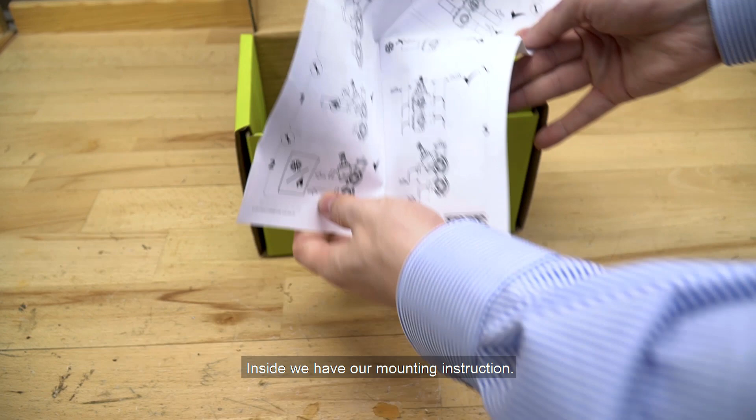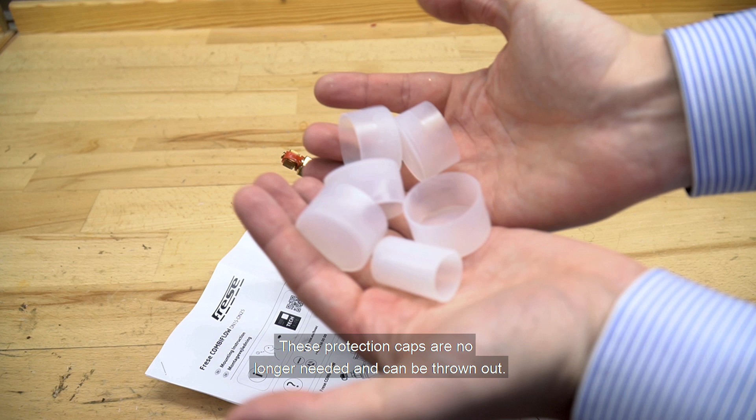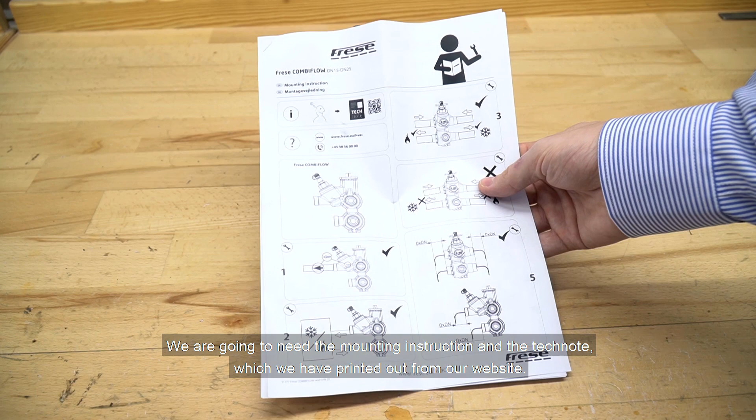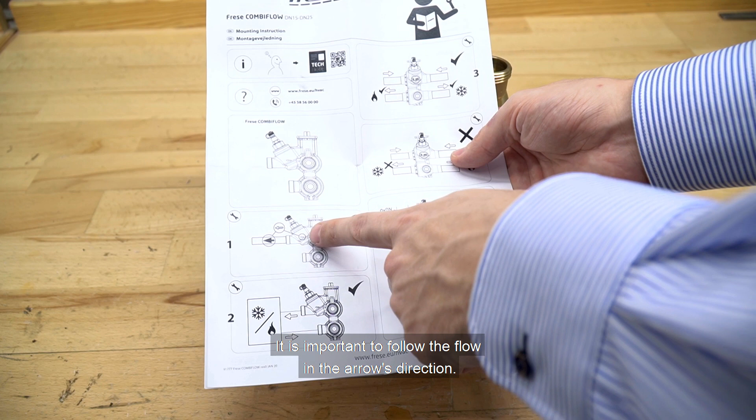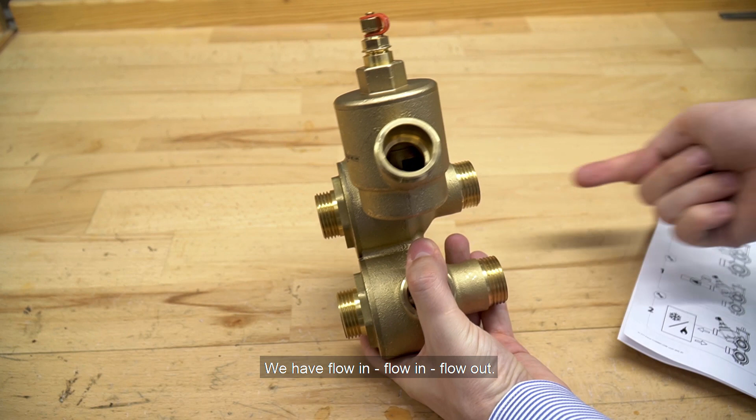We're going to need the mounting instruction and the tech note, which we have printed out from the website. We have our valve, which looks like this. And it's important to follow the flow in the arrow's direction. On this one we have the arrow here, so the flow goes out here. Flow in, and flow out, and flow in, flow out, and flow out.

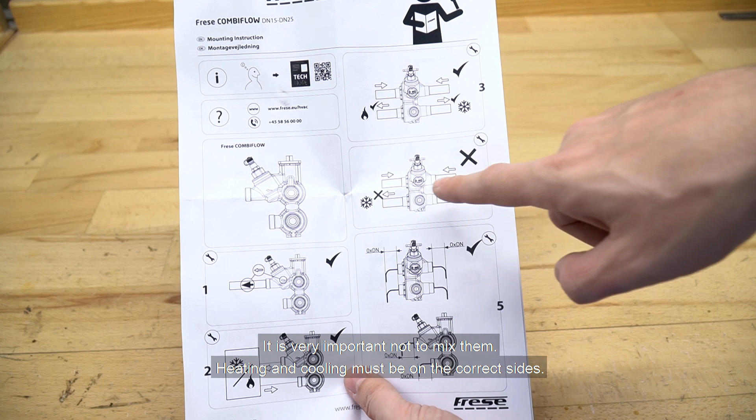And these go to the fan coil. And we have heating on one side, cooling on the other side. Very important not to mix them. Heating must be on the correct side and cooling must be on the correct side. And we have heating in, and heating out, cooling out. These two connect to the fan coil.

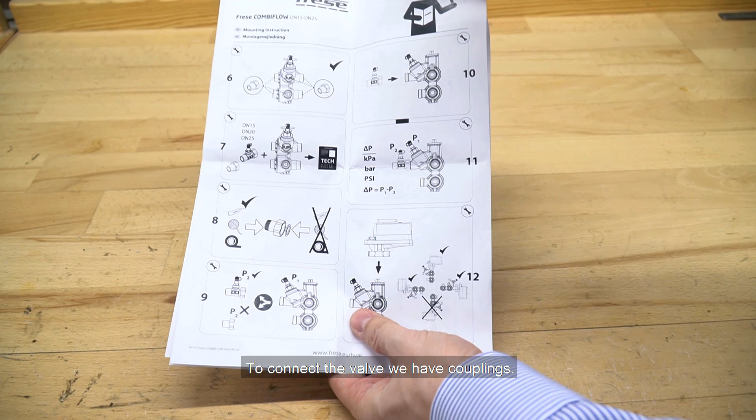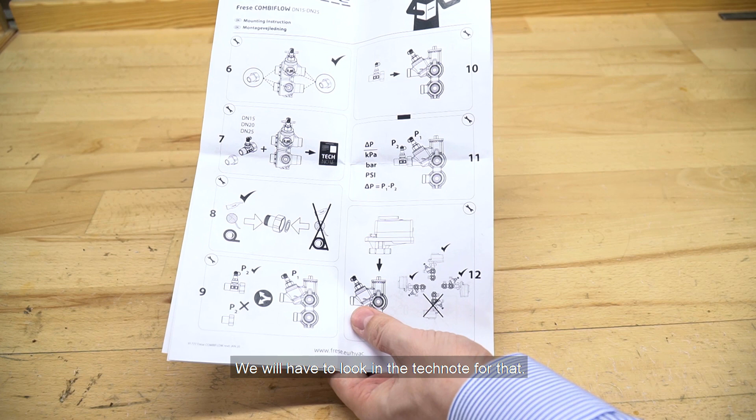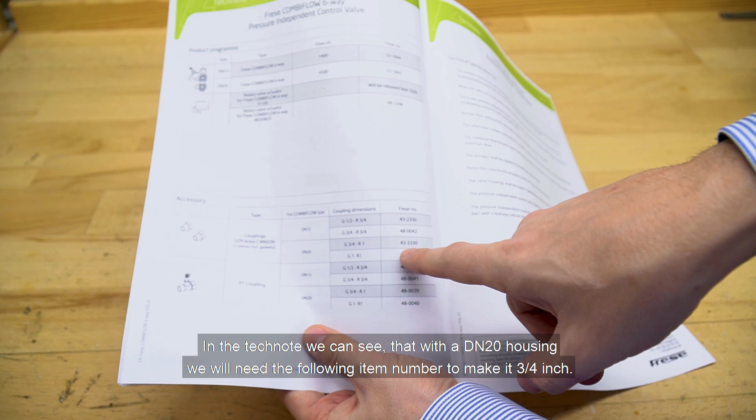To connect the valve we have couplings, and they come in various sizes depending on the size of the valve, along with a PT coupling. We'll have to look in the tech note for that. In the tech note we can see that with the DN20 housing that we have here, to make it a 3/4 inch we'll need this following item number.

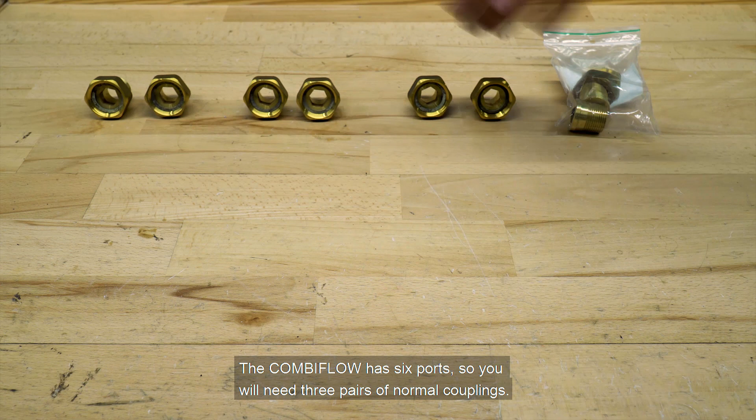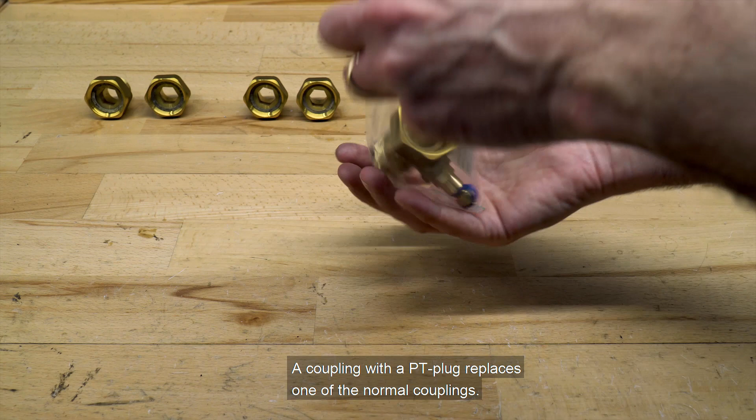To mount the COMBIFLOW you will need 6 couplings. The couplings come in pairs of 2 in a bag, and the COMBIFLOW has 6 ports, so you will need 3 pairs of normal couplings. If you wish to measure the differential pressure, you will need a coupling with a PT plug. The coupling with the PT plug replaces one of the normal couplings.

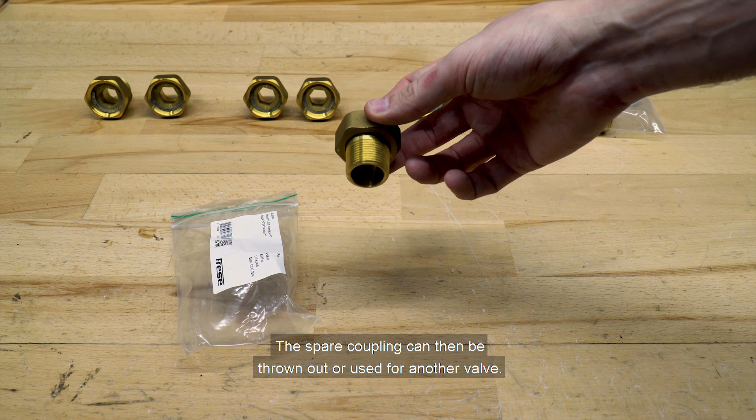The COMBIFLOW thus uses 5 normal couplings and a coupling with PT plug. The spare coupling can then be thrown out or used for another valve. If you have 2 COMBIFLOWs, you will therefore need 2 couplings with PT plugs and 5 pairs of couplings, or 6 pairs if you don't need to measure the differential pressure. So we have 3 of these coupling sets now. These are easily mounted.

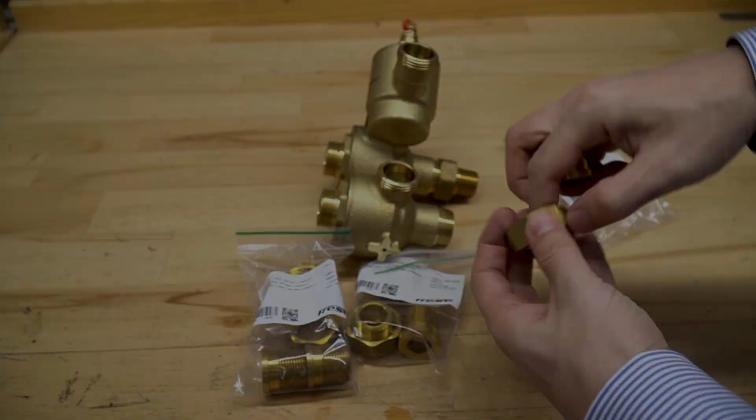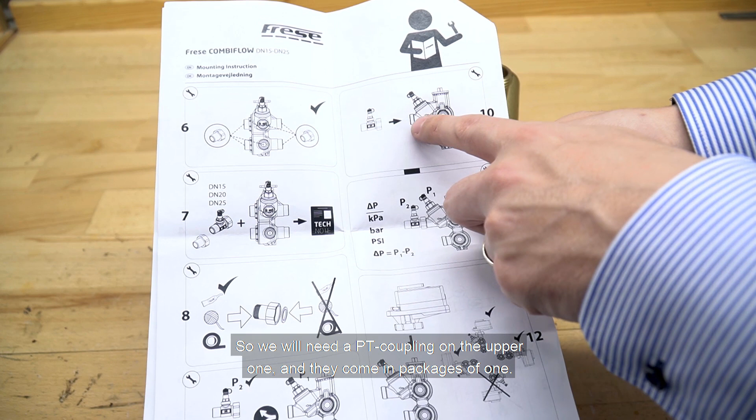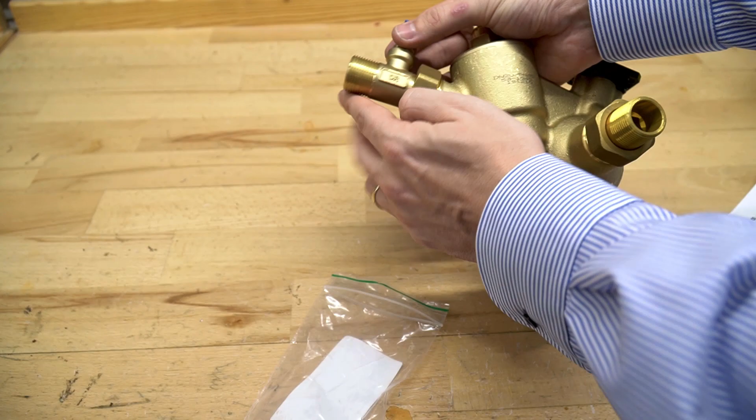Now, in our example here, we are going to want a PT plug in order to measure the differential pressure, P1 and P2. So we'll need a PT coupling on the upper one, and they come in packages of 1. Remember to tighten the couplings.

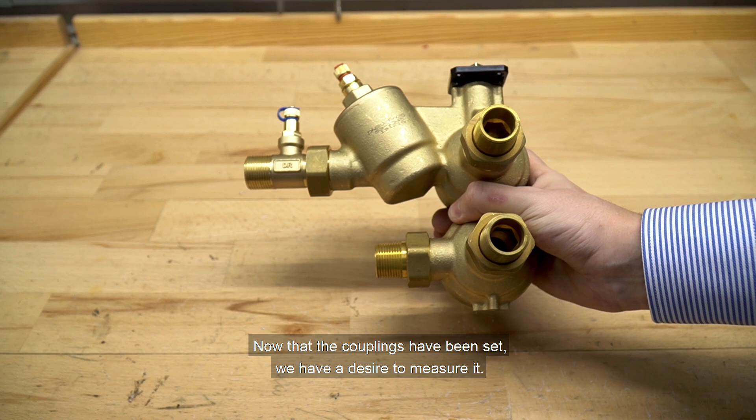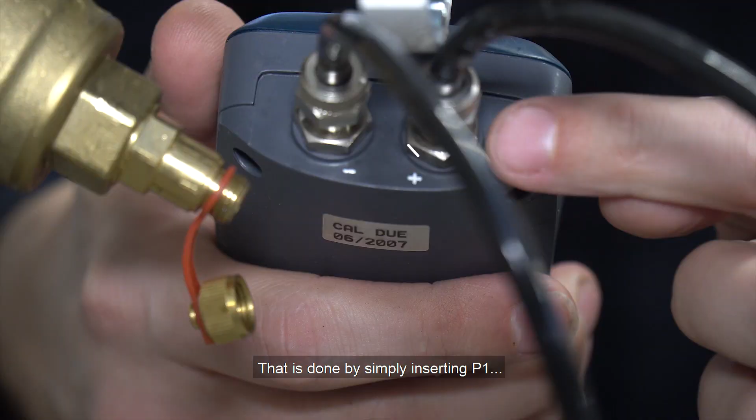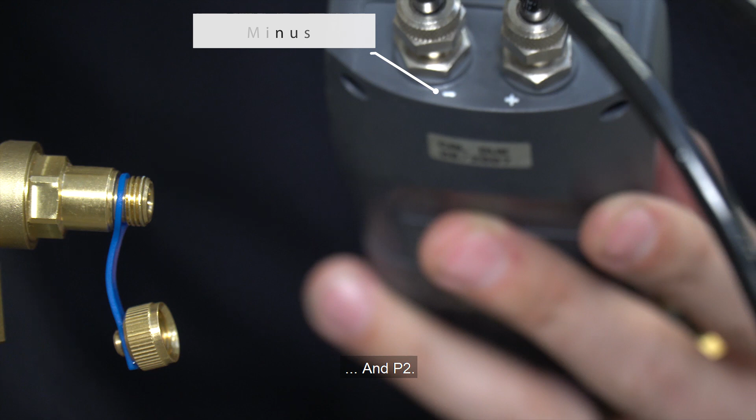Now that the couplings have been set, we want to measure it. That is done by simply inserting P1 and P2. And now we can measure the differential pressure.

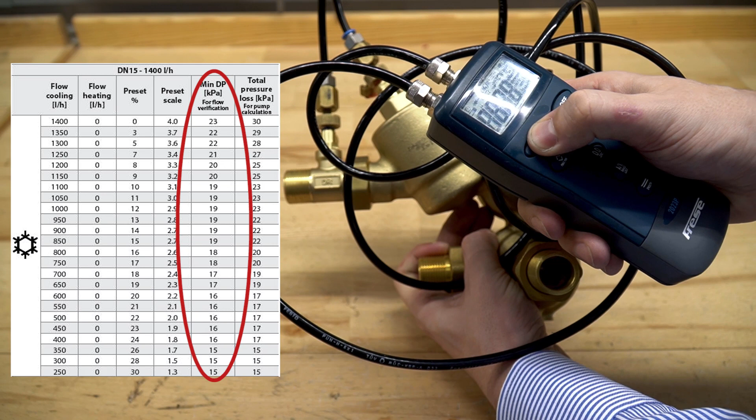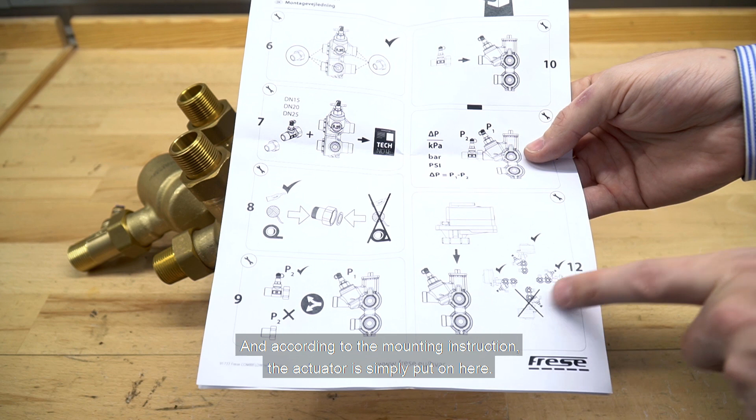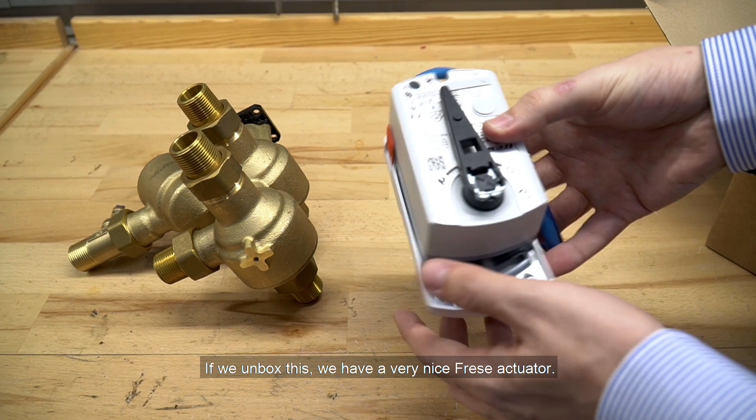So we are going to mount the actuator now, and according to the mounting instruction, the actuator is simply put on here. We have an actuator here in a brown box. Quickly unbox this. We have a very nice Frese actuator. And this one is, according to the image, simply put on.

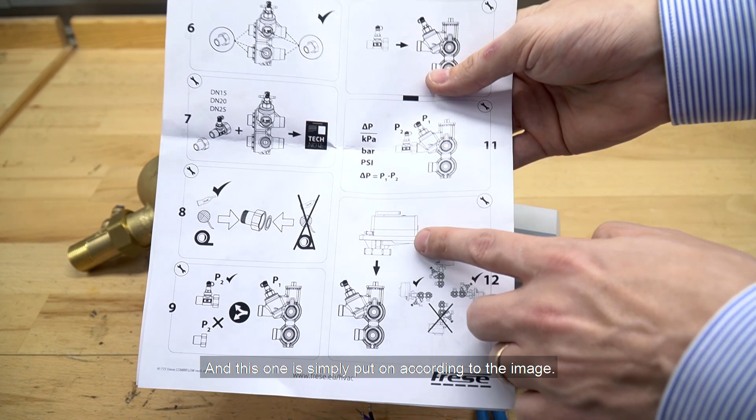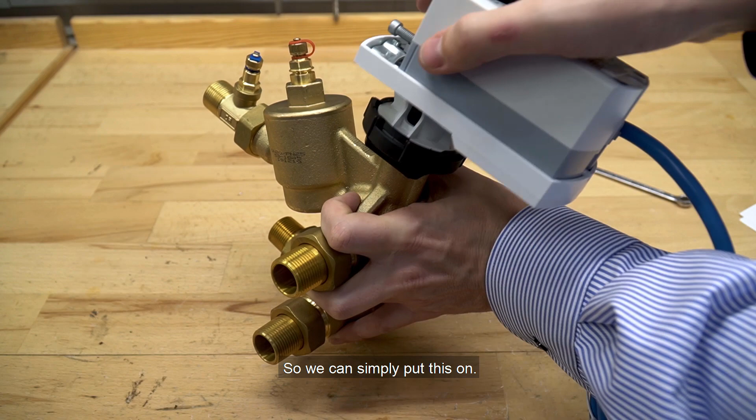For it to fit, we're going to turn this one so that it is square compared to the holes, same as the actuator, so that we can simply put this on. And once it's on, simply turn it. And it doesn't matter if it's one way or the other way. Once it's turned, it's locked in place and doesn't get off.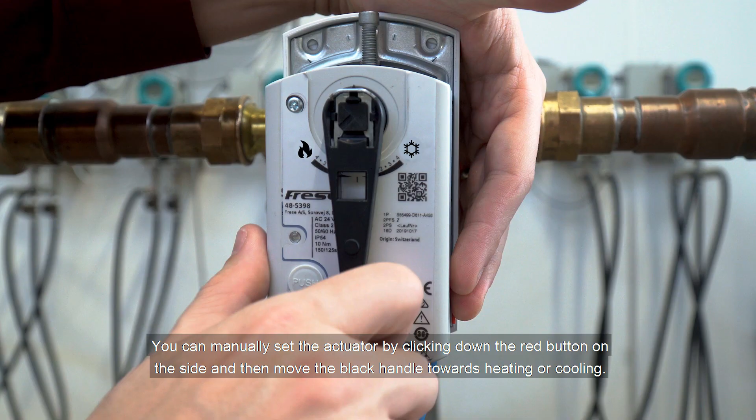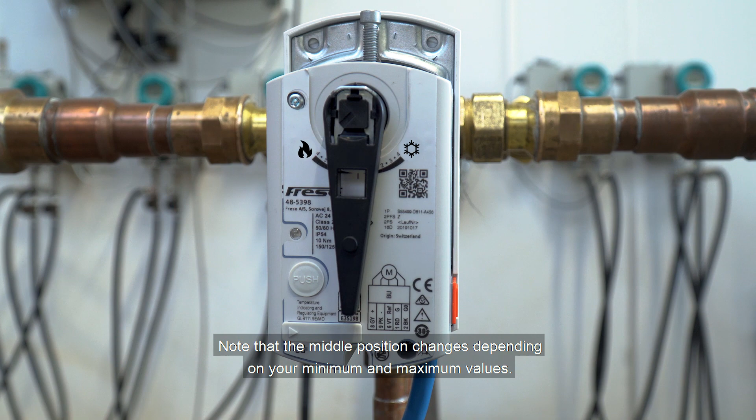We have cooling in on port 1 and heating in on port 2. You can manually set the actuator by clicking down the red button on the side and then moving the black handle towards heating or cooling. Setting it in the middle position closes the valve. Note that the middle position changes depending on your minimum and maximum values.

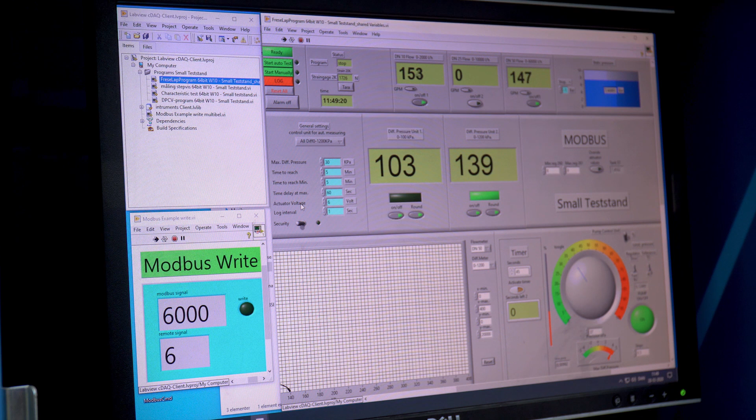The valve closes in the middle. The actuator's middle position changes depending on your maximum and minimum. In our case, our minimum is 17%, our maximum is 72%. If you use the formula in the tech note, you get 60%, which is our new closing position.

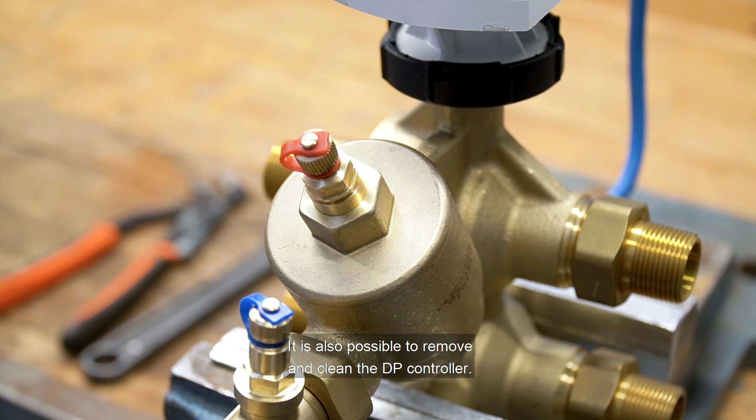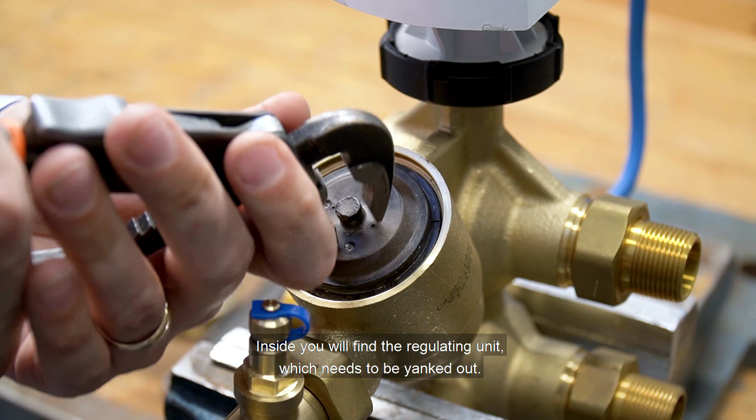It is also possible to remove and clean the DP controller. Remember to remove the pressure before removing the cap. The cap is easily removed. And inside you'll find the regulating unit, which needs to be yanked out. This will enable you to remove the DP controller and clean it.

Simply plug the regulating unit straight into the valve and click it in. And then reattach the PT plug.

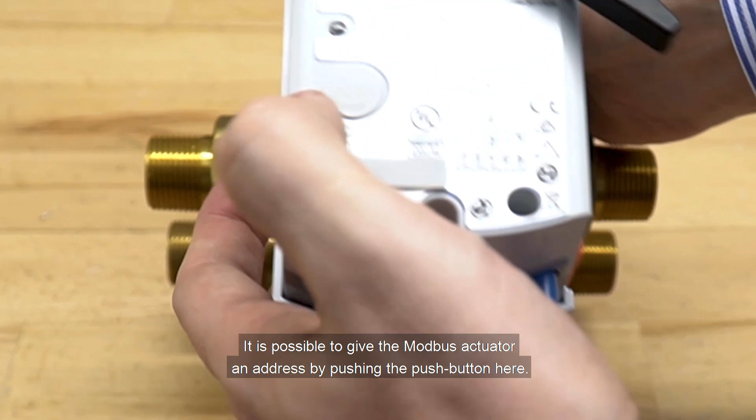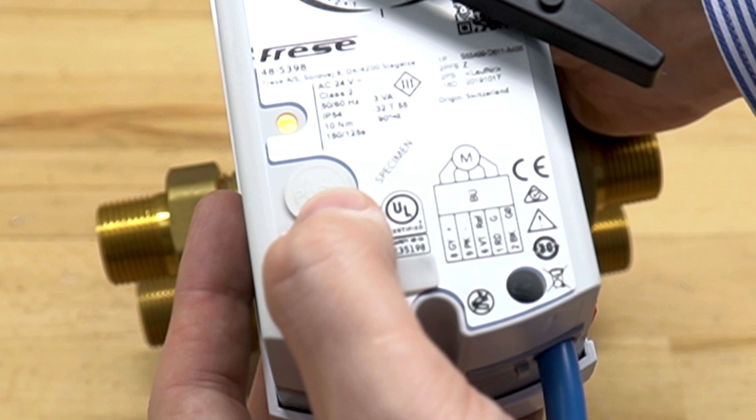We have now attached the actuator to the modbus and the power, 24 volts AC. It is possible to give the modbus actuator the address by pushing on the push button here, and then go directly to the modbus and program it. But we are going to use our AST20 handheld tool, which comes in a nice packaging.

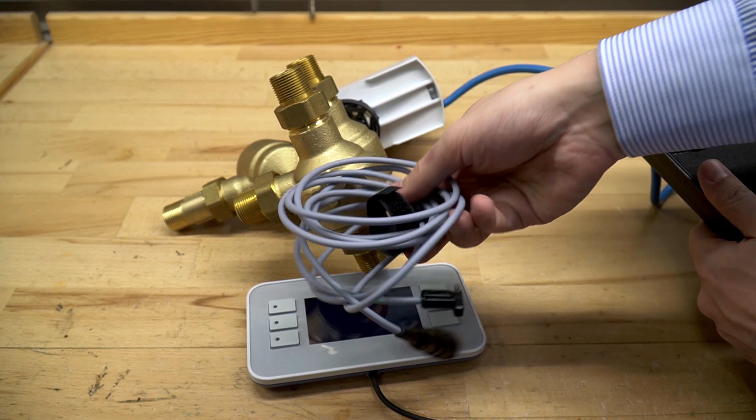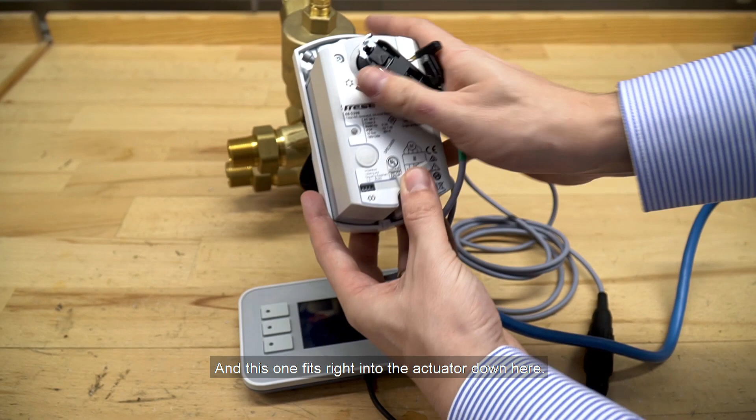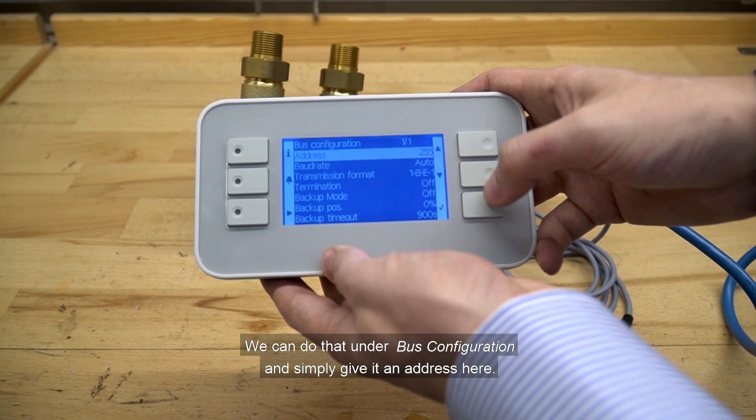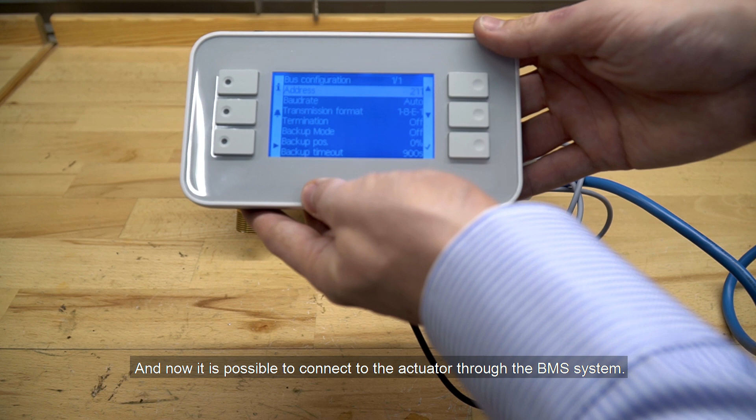The handheld tool comes with a 7-pin cable. This one simply clicks on. There we go. And this one fits right into the actuator down here. The handheld tool enables us to give the actuator an address so that we don't have to use the push button. We can do that under bus configuration and simply give it an address here. And we'll give it the address 211. And now it is possible to connect to the actuator through the BMS system.

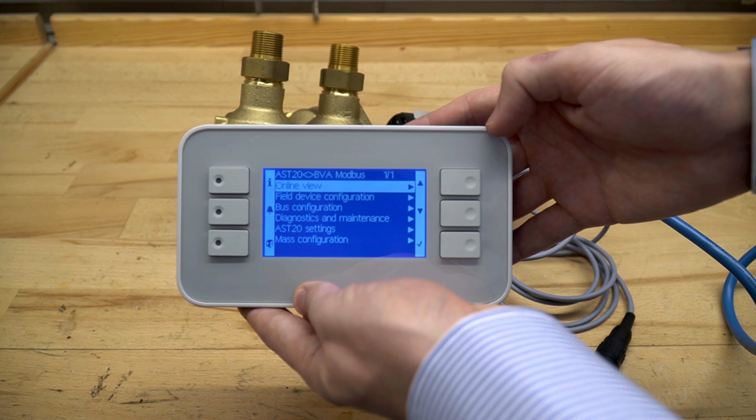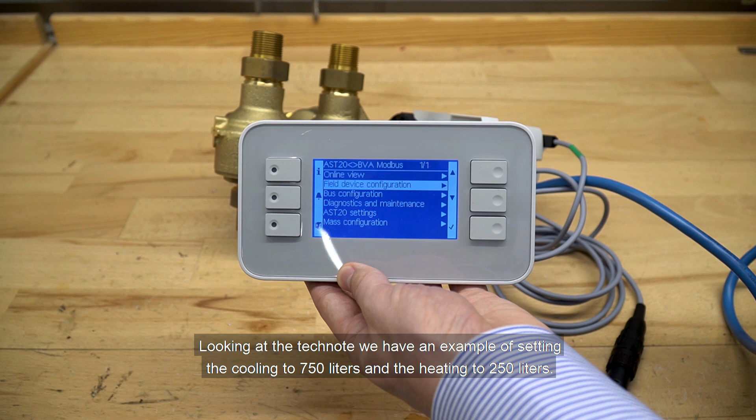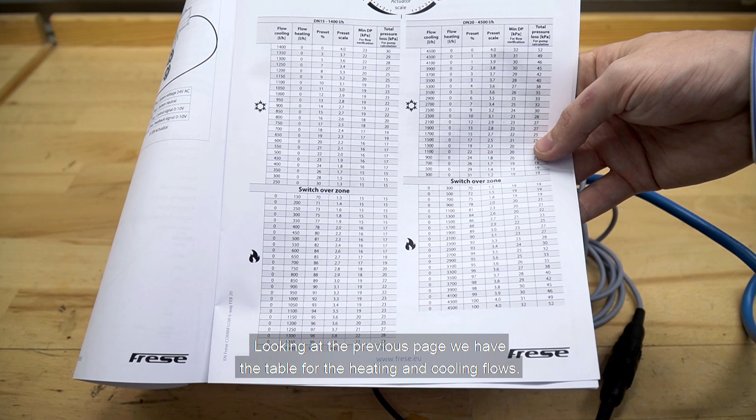We can also configure the maximum flow setting on the heating and cooling side under Field Device Configuration. Looking at the tech note, we have an example of setting the cooling to 750 liters and the heating to 250 liters. Looking on the previous page, we have the table for the heating and cooling flows. We have a DN20 valve here.

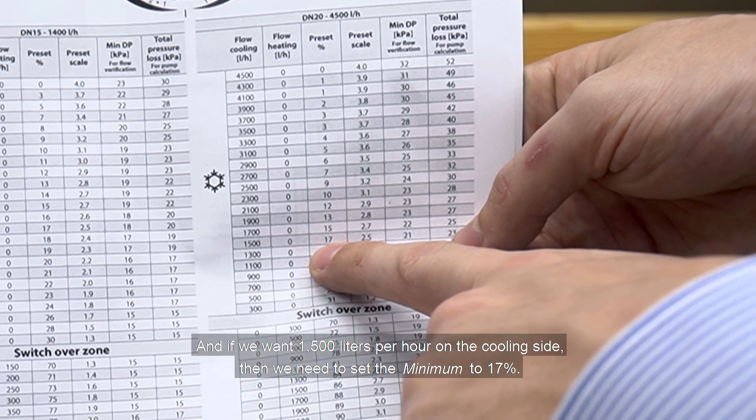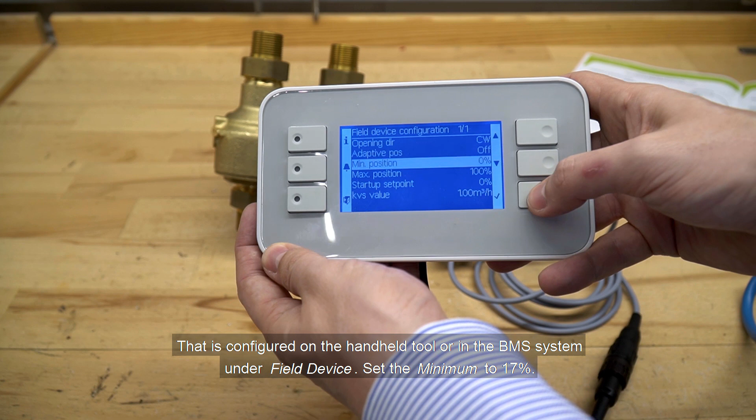And if we want 1500 liters per hour on the cooling side, then we need to set the minimum to 17%. And if we want 500 liters on the heating side, we need to set the maximum to 72%. That is configured on the handheld tool or in the BMS system: under field device, set the minimum to 17%, and set the maximum to 72%.

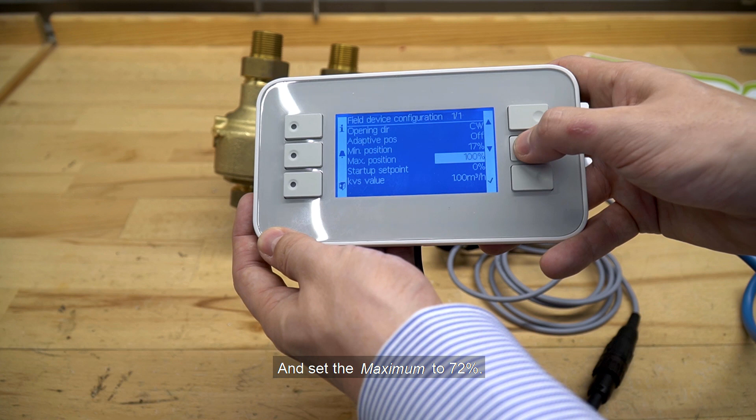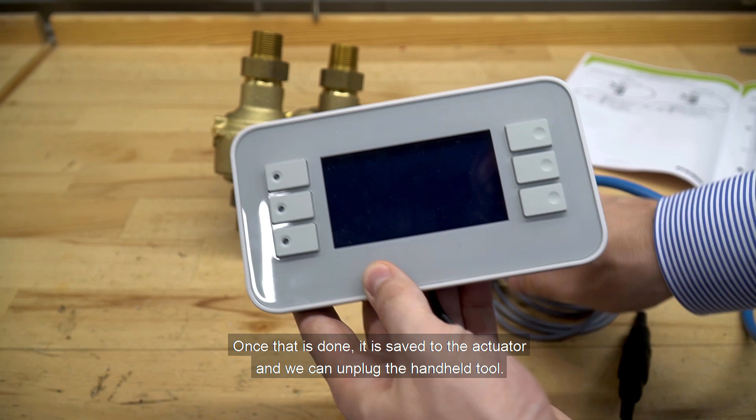And once that is done, it is saved to the actuator and we can unplug the handheld tool. The actuator will now run from 0 to 100%, where we have set that 0% is 1500 liters on the cooling side and 100% is 500 liters on the heating side. I hope this video has helped you install your valve correctly.